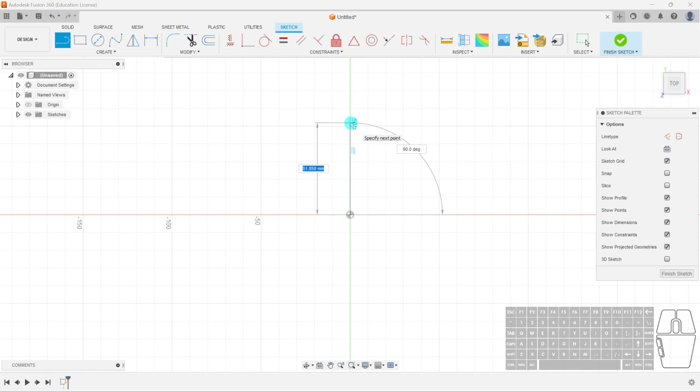So we'll make that very simply using a line tool, and we'll just start anywhere. In this case, I'll make things simple and start from the origin point. We'll bring this up to about - it doesn't have to be perfect, but let's do a 1 centimeter paperclip length, so 10 millimeters. We'll zoom in so we can see better.

Now we're just going to make a paperclip based on this grid here, as you can see. So I'm going to use that grid to help guide me along the path. In this case, what I'll do is create another line here. Actually, instead of creating a line, I want it to be a curve, so I could select a circle instead. Maybe make it here somewhere. I can drag it out, and now I have a curve.

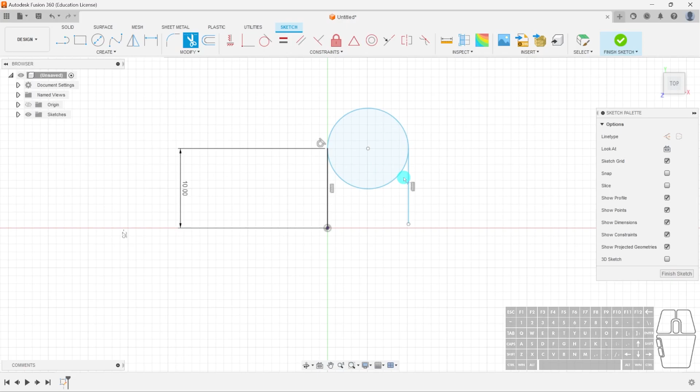If I select my line here, I can continue that line down, and I'll have my paperclip. If I want to get rid of this edge at the bottom, I can press the shortcut T, which is trim - alternatively you can use it from this icon here. As long as these lines are connected, it's able to cut out just that other half of the arc. That's one way we can create an arc like this.

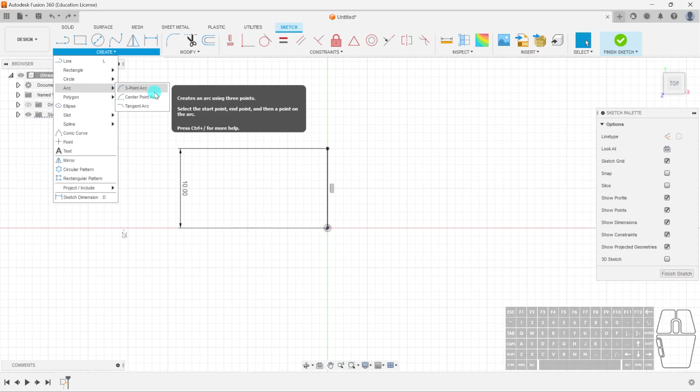But there's a much better way of doing this. I'm going to Control Z, and I'm back to my original one here. What I can do is go to Create, select Arc, and select a 3-point arc. With the 3-point arc, I can select the first point here, which is to my line. I'll drag it out somewhere around - let's do 10 as well.

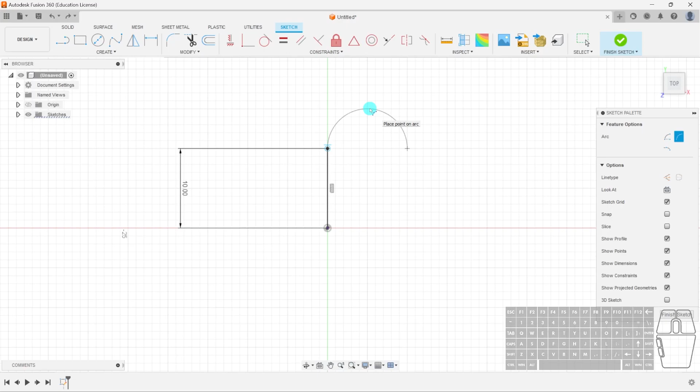I'm going to left click, and now if I drag it out again, you can see I can select how far out my arc should be. In this case, if I drag out to somewhere there, you can see it snaps, and there's that little tangent icon - that just means it's a straight line followed by a perfectly arced U-turn curve. So I'll click that, and you can see I've got a straight line, an arc.

Now if I go back to my line, I can click on this, draw it back down, and you can see I also have a straight tangent line. So I'll draw around here - again, doesn't need to be perfect. I'll hit escape, and now we have our straight line, a U-turn, and another straight line.

Now another thing I want to show you is the different types of arcs we can use. In this case, we want there to be a straight line here, but I want to make sure I'm in line basically with these two lines here. So I've explained that horribly, but I'll show you what I mean.

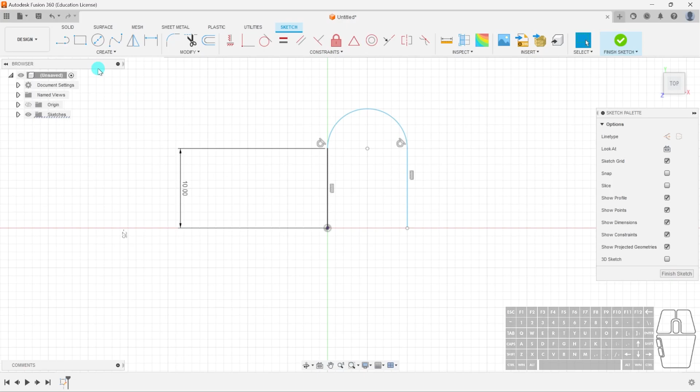What I can use is the offset tool. I'll select just this line here. I can drag this in, and I want to give this, let's say, a 2 millimeter offset. We'll hit OK. Now with this, I can actually connect an arc to this line and this line. So you can see the shape that I'm going for.

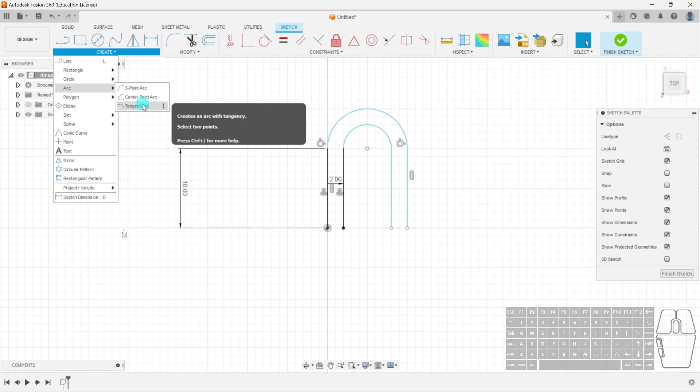So if I go to create arc, I'm not going to use a 3-point arc this time - I'm actually going to use a tangent arc. What this does is it lets me select 2 lines, and it'll automatically create a tangent arc to those lines. So you can see how that's moving out right now.

You can see I can keep going, and it's always going to be tangent to this line here. If I now select the next one, you can see it has created an arc that will be tangent to this entire shape, like this line specifically, but it's now created this shape for us. So this is just a very simple paperclip shape.

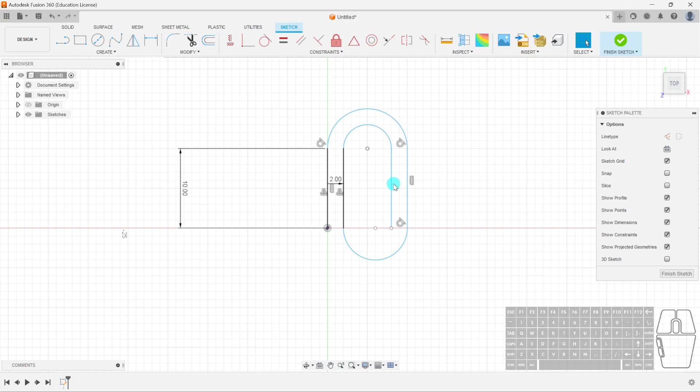This might work. You can always adjust the angle. Let's say I want this to be a little bit bigger, so I can do 3. You can see I've created a bit more of a symmetrical shape, right? We'll leave it like this for now, it's fine, and finish sketch.

We have our sketch of our paperclip, but no 3D body. So what can we do? Do we just offset this, revolve, maybe extrude? There's a much simpler way.

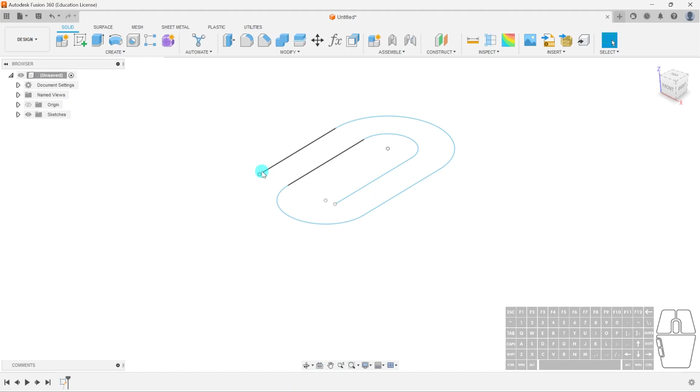What we're going to do is create a circle on this edge here. Now the good thing about drawing my line on the origin is that I can select this plane, hit create sketch, select a circle tool, and I'll just make this about 1 millimeter. It doesn't have to be big, you can make it any size you want. I'll just hit 1 and finish the sketch.

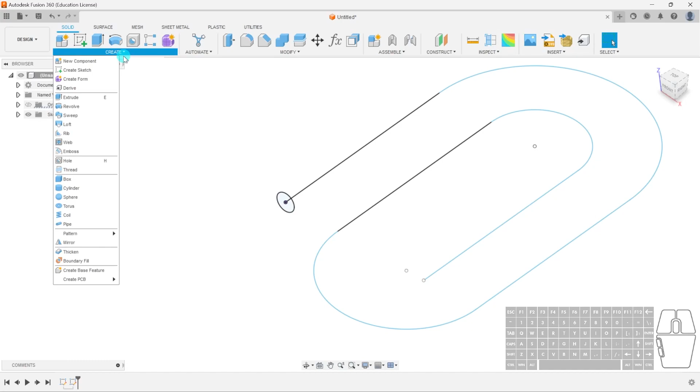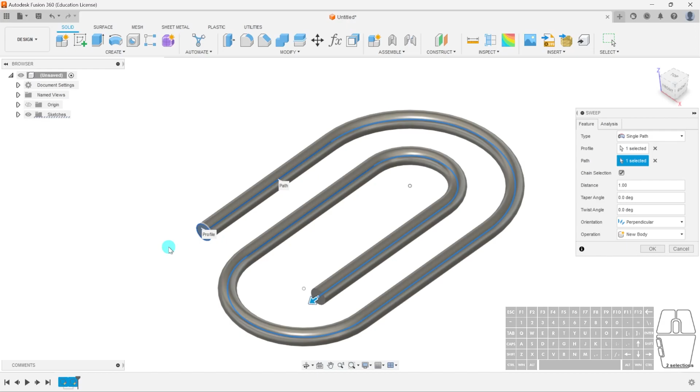I've got my circle, and now if I hide my origin, you can see I've got a circle that's somewhat connected to this line here. We want this to be connected because if I go into a new tool called Sweep, under Create, Sweep, if we select the profile, the circle, and next select the path, this line here, you can see it's swept this circle. It's essentially extruded this circle along the path we've drawn, and this allows us to create very complex piping or different shapes based on the path we want. We leave the rest as defaults, it's fine, hit OK, and just like that, you have a paperclip.

Now that's obviously with the sketch, you can draw different sketch shapes. You can draw a heart, it's up to you. In this case, I want to show you something very important.

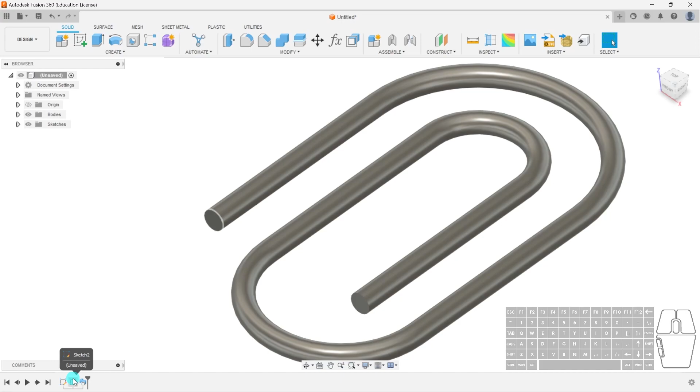The reason why that worked is because our sketches, our two sketches here, are connected. Let me just go back. Now what does that mean? It's obviously not connected here, there's no line that physically connects them, yet Fusion still understands we want to do it this way.

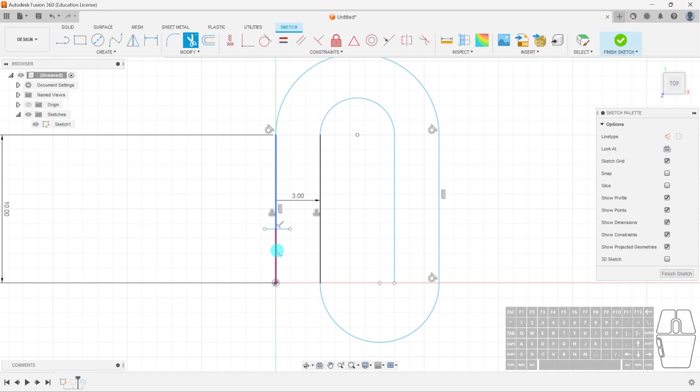Well, what happens if we do this? We're going to go back to our first sketch in the timeline, the first one, and I'm just going to shorten this a little bit. I'll draw a line, shorten this, delete this. Oh yeah, because I shortened it, remember we used an offset, so this is going to be affected as well. I'm just going to make this easy on myself and do that. Doesn't matter. So now we have our path and our circle, but it's not connected.

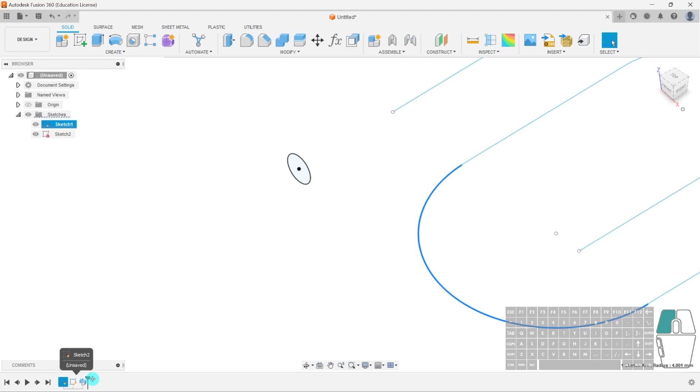So now if I go back and do my sweep command, I'm just dragging the history marker. Watch what happens, see that? It's lost that path because essentially it's not properly connected. If I double click on it, you can see I can select the path, but it's getting very confused as to how to follow it.

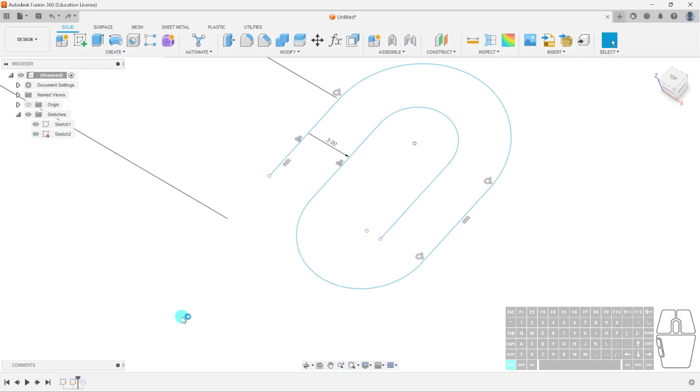So it's very important that you connect paths correctly. In fact, it's better if we Control Z all the way. It's not ideal, but it's still better if you overextend the path, and I've just drawn an extra line here. Finish sketch, and if I go back to my sweep tool, you can see it's back to normal.

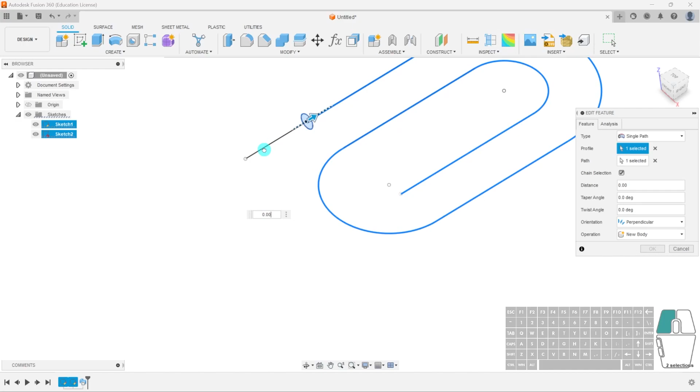And if I double click on my sweep tool, I can actually adjust it and make sure it's going down the path essentially. Oops, I just noticed my path only selected the one. For this I'll select this, and now you can see it's going to follow my entire path.

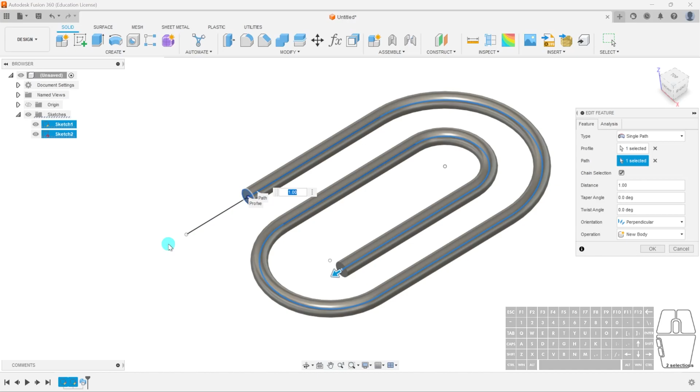I can always adjust it. If I want to shorten it, I can shorten it down that way, whatever way, it's up to you. But it's better in this case to have a longer path than a shorter path, so make sure it's connected.

So what happens then, let's say if we go back to this, I'll just select the entire thing. I'm going to... yeah, I can't do that in Fusion, I forget. You know what, let's just make this simple. Let's just delete this, and instead of starting my line in the origin here, I'm just going to put it out here like so. And in this case, I'm just going to draw a very simple arc.

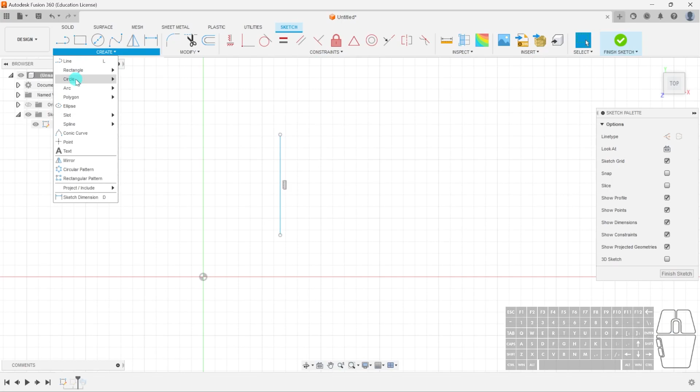Something like this, okay? Nothing fancy, it's just to prove a point. So, finish sketch. You can see here, oh no, this is definitely disconnected. We're going to have issues with the sweep tool again.

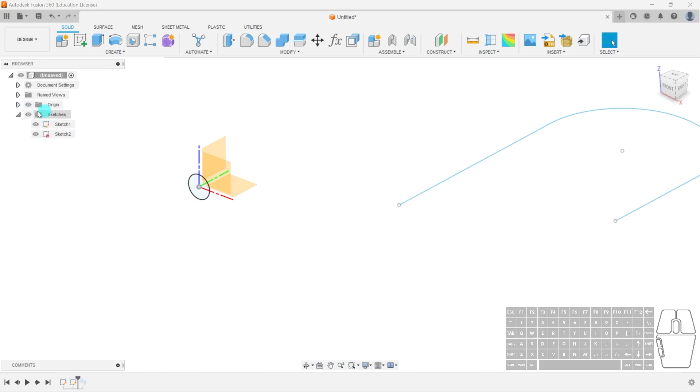But how do we create a plane here? Because if you look at the origin, our origin point is here, but it's not in line. This won't be in line either, at least not in the correct orientation. This is not in the correct orientation. It's not in line with this line either. So what can we do?

This is where construct planes come in handy, right? So planes are essentially like pieces of paper that you position in 3D space, and these pieces of paper will hold your sketch that you can then use to extrude your 3D bodies from.

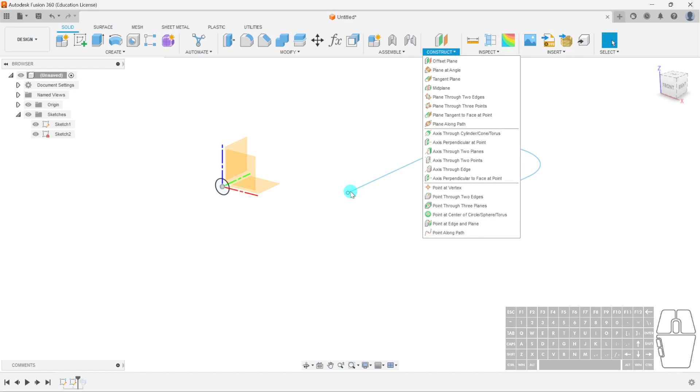So in this case, we need a piece of paper on this very tip of this line, right? So what we can do is select plane along path right here, and this does exactly what it sounds like. If we select the line, you can see now it's created a plane there, somewhere where I clicked, but we don't want it to be in the middle. We want it to be at the very end. So we select the arrow and drag it till it can't be dragged out anymore.

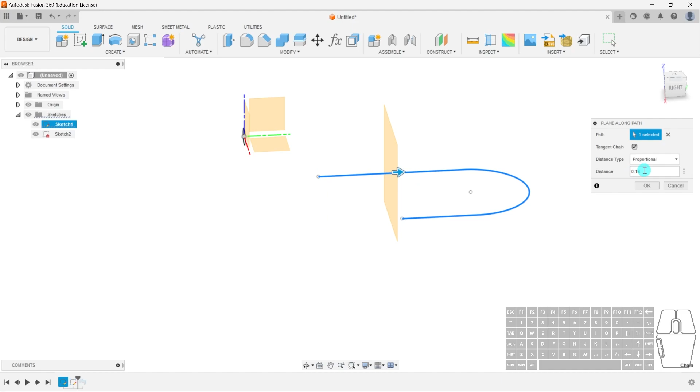We hit OK. Or alternatively, you can always select the distance here. Again, it's proportional, so the start would be 0. Now it's at 18% of the distance. Hit 0, hit OK, and now our plane is right on the tip of this line.

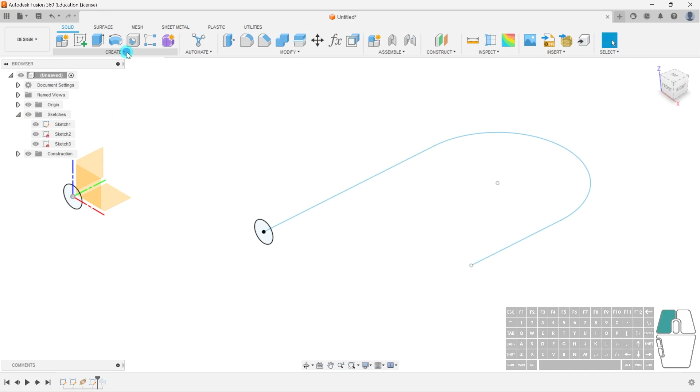So when we start to draw it, it will be connected to that line. So if I draw a circle now, okay, we'll make this 1, finish the sketch. And if I bring up my sweep command, select the circle, select the path, you can see now it's connected, everything is good.

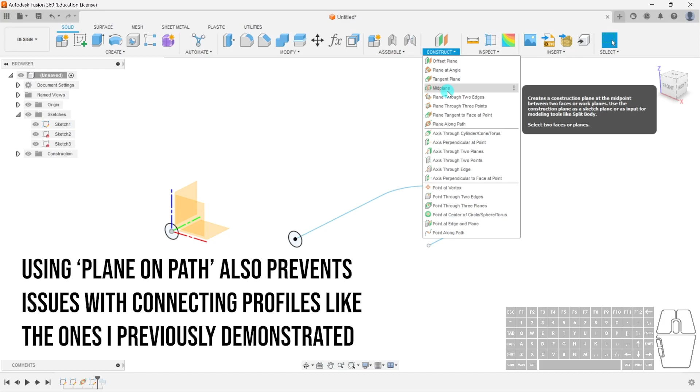So it might be a good idea not to rely too much on the origin planes, try to add your own planes. There are a few different types you can use. You can use offset planes, tangent planes, mid planes. We'll look into those more in future tutorials. But planes are another very critical aspect of sketches, okay?

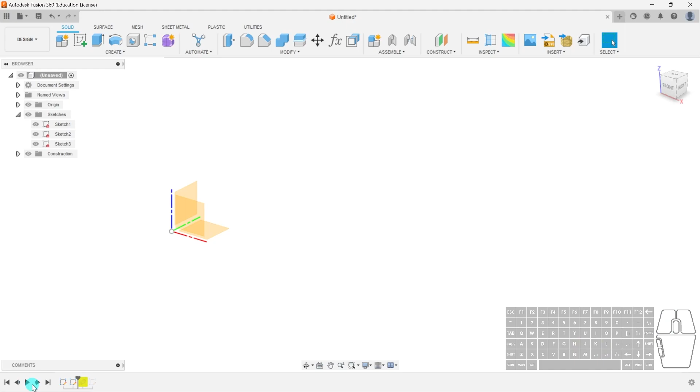So 2D sketches are cool and all, but have you ever heard of 3D sketches? Now that's the really cool stuff, right? So we'll get rid of all of this. In fact, I'll just delete all these history features. Oops, wrong one. So we're back to square one, right? We'll just hit home. Now, we want to do 3D sketches instead.

What we can do is, again like normal, create a new sketch. We'll select the bottom plane. But if you notice, all the way down here is 3D sketch. If we check this, we enable the 3D sketch functions.

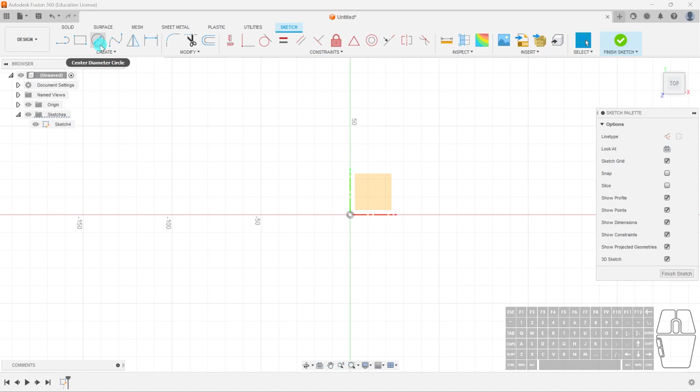And so if we start to draw shapes, okay, so let's just create a new paperclip. Again, I'm going to start from the origin because it's just easier. I'll just drag it out to, I don't know, around here. Doesn't really matter, okay? And now what I'll do is I'll hit escape.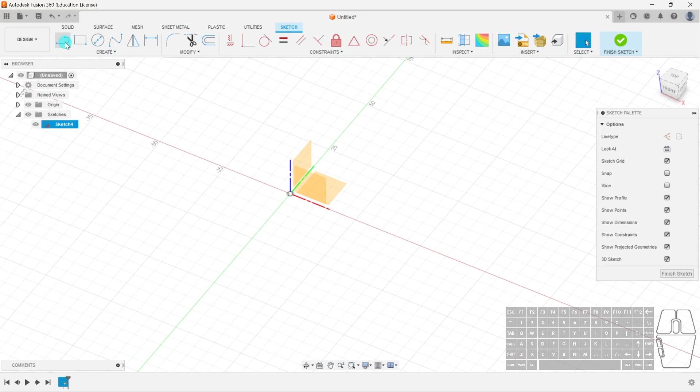And you can see that my line is following this path, right? But I don't want it to follow this path. I want it to actually go up instead. So let's just say I delete this line first, and I'm just going to draw from here a new line.

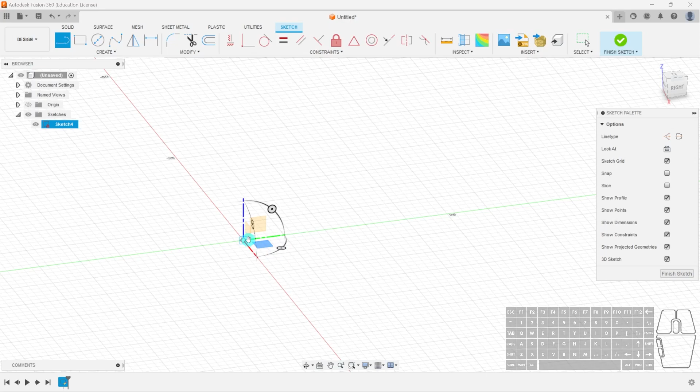And again, you can't select it from the top view. What you need to do is actually rotate the camera. And here it might be a bit hard because of the origin, so I'll hide it first. You can see there are actually little planes in our sketch tools now. What does that mean? It means if we select this plane, it's going to select this plane to draw on. But if I select this plane here, now our rotation has changed.

So if I draw a line this way, and I'm just going to give it like make it a 45-degree angle, okay? And we'll just do 20, okay?

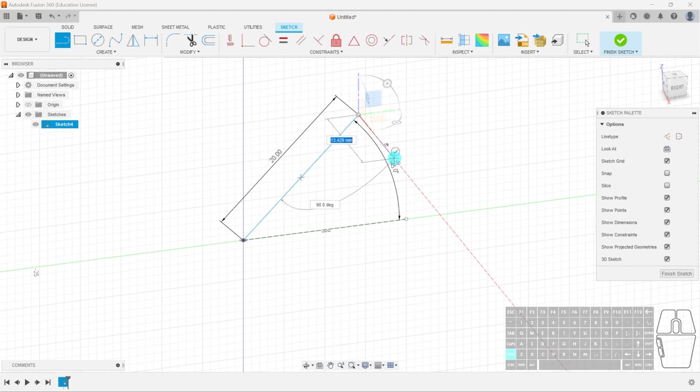If we left click, you see that plane appears again. Now let's say I want to move out in the opposite direction, along this red axis here. What I'm going to do is select the bottom plane. Now it's aligned to the red axis. If I draw out my shape, let's go 20 millimeters this way.

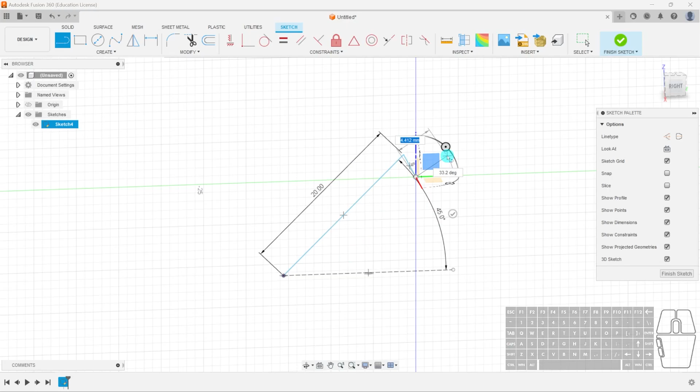Again, I want to go back down in this direction. I'll select that plane again, the side plane, go back down, and I'll just make this an even 20 as well. Left click. You can see now our sketch is actually in 3 dimensions. It looks a bit like a wedge, right?

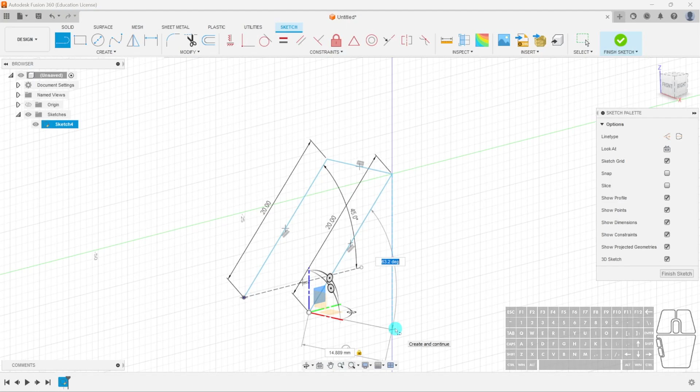That's cool. Now let's say we want this to be a rectangle. That's fine, we'll hit enter or escape. You can see now this is our sketch. It's moving up, at an angle like so. If you look from the right, it's going up at an angle. If we look from the side, it's going up at an angle too.

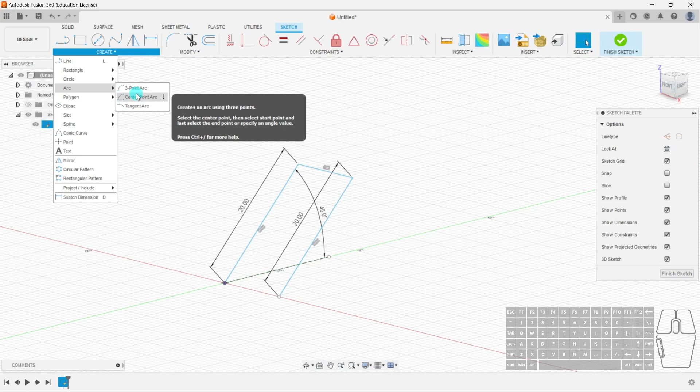The cool thing is we can then go into Create, make an arc, and do a center point arc. So we select this point, we'll select that point, and now if we move out, you can see how that's created that little weird shape. You can create different angles based on the plane that we select.

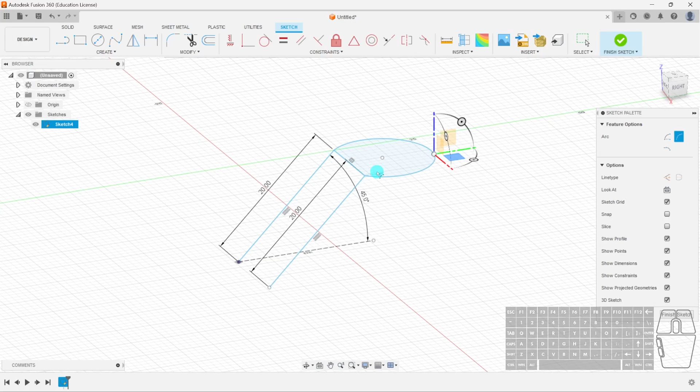If I want it to go up instead, let's Control Z and select the arc again. 3-point arc, just click this point. Now instead of the bottom one, we'll select the top face instead. We'll select this and move it up. Something like this will do.

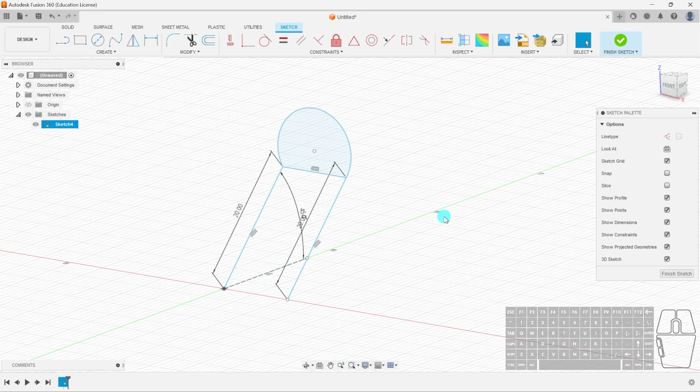You can see how that shape has changed now. Let's hit enter. Now instead of being flat, it's pointing upwards. This is pretty cool, so we can always create some other different cool designs.

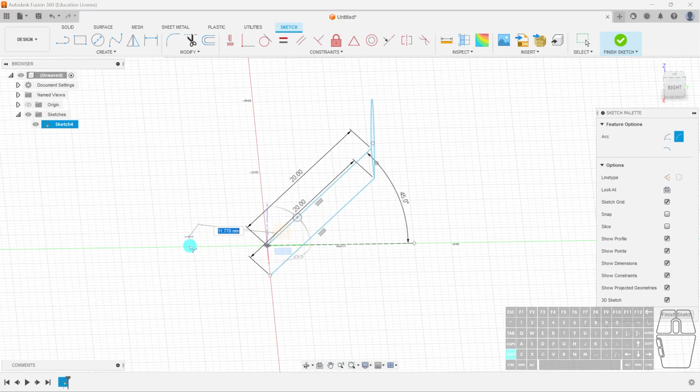We'll again create another arc. We'll start from here, and let's say we want it to go down, or maybe we want to stick it to this plane. We want to have a flat plane, it goes up and then it goes up again. We can select this point somewhere in the middle, drag it out, and then click another point, drag it out, and just like that, we have a new shape.

If we finish sketch, you can see we have a 3D sketch. If you want to get rid of this we can delete that, and just like that, it's cool.

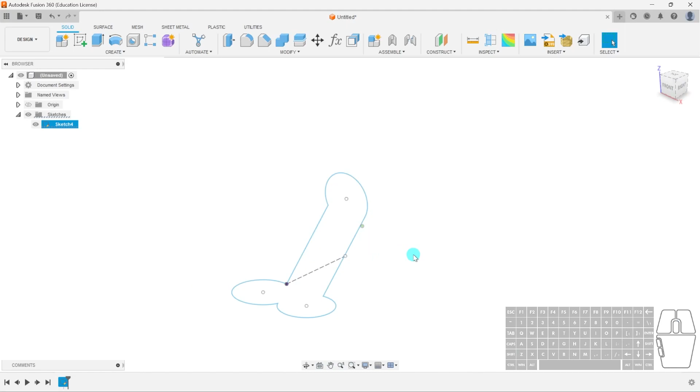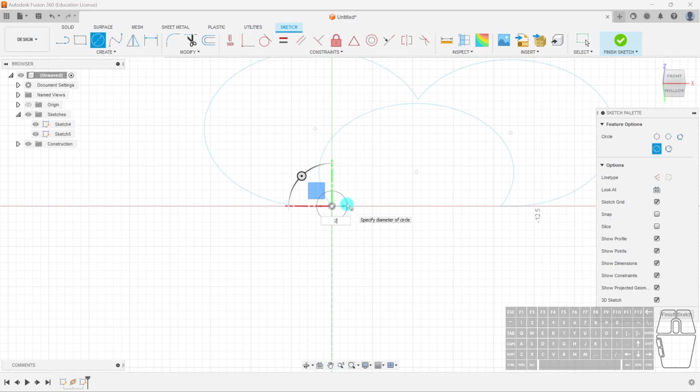The cool thing about a 3D sketch is that we can then go into Construct, Plane Along Path. We'll select the path, hit OK, anywhere here is fine. We'll select on the plane, draw another circle again, make this a 2 just to make it a bit easier to see, then finish sketch.

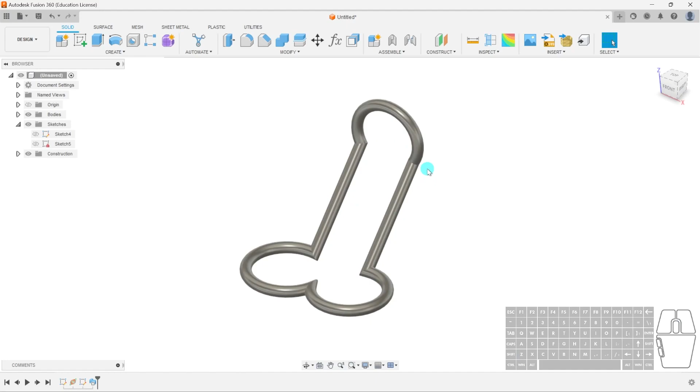Now if we go back into our sweep, using the shortcut, select the profile, select our 3D path, you can see now we have a 3D paperclip, or at least close enough to one. This could be anything - a bottle holder, a phone stand, anything you want.

It's pretty cool, so this is how you would utilize 3D sketches. Just remember, if you want to ever go back to 2D sketching, when you click on the sketch, make sure to uncheck this before you continue. Otherwise you might get lost and end up making three-dimensional sketches.

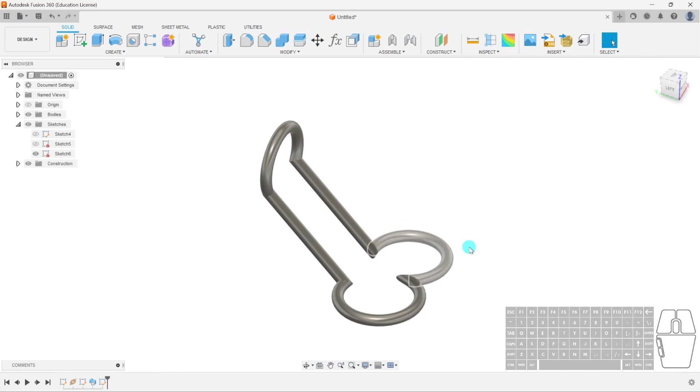You can always save this, and that's basically it. Make your own designs, have fun with it.

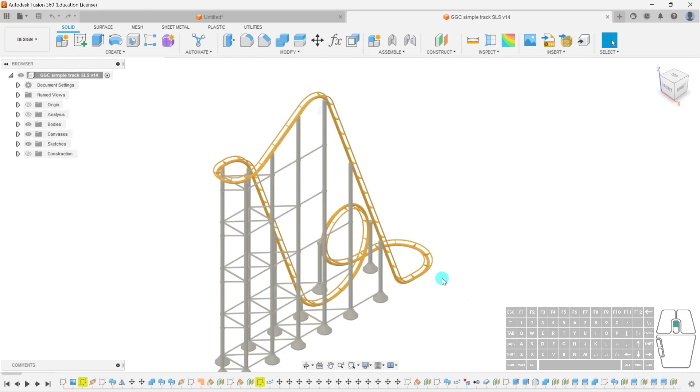With 3D sketching, one of the really cool things that we actually did for our GGC, at least my GGC group, I'll show you here. For our GGC project, what I did was I modeled a roller coaster track, and all these extrusions here are just a sweep command following a 3D sketch.

So you can plot out your path, sweep it, and have a nice, cool structure that you can then 3D print and actually use. Of course, this was very painful to make, and I will never forget it for the rest of my life.